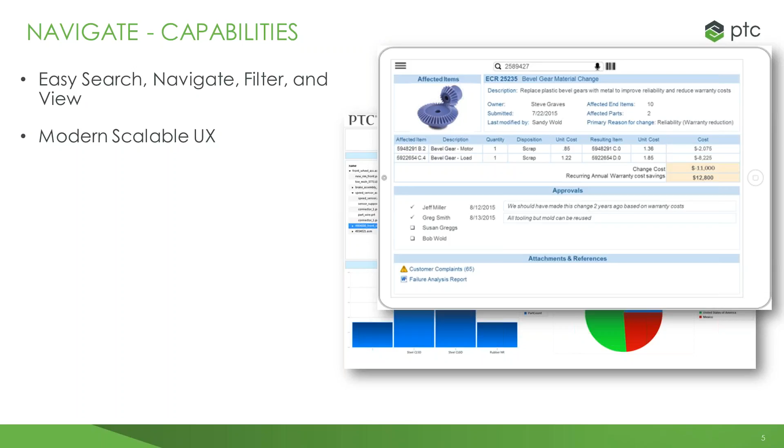It provides a modern, scalable user experience, being able to pull this information up within a web browser. You can view it just like you would within Windchill. You could view it within a tablet. You have all that capability right at your fingertips. Then lastly, it provides an interoperability layer for all other applications. Being able to move smoothly between these different applications where the information is residing allows for a quicker ease of use and a very simplified user interface.

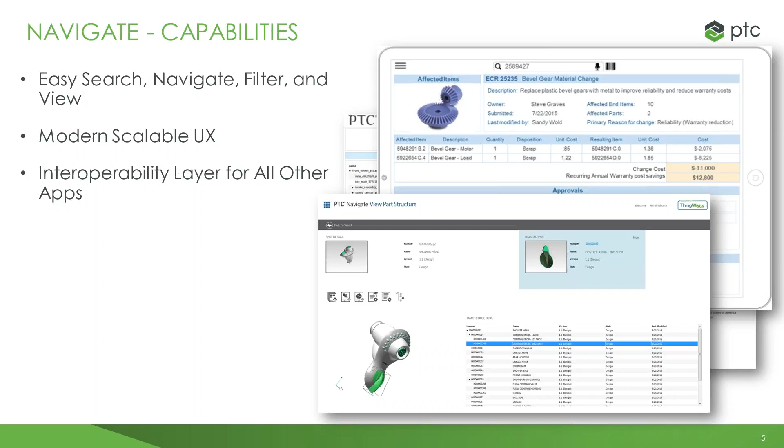So what we have here is basically a laundry list of the different out-of-the-box applications that you get within Navigate, so pre-configured. I'm not going to run through these. I'll mention a few of them, but we're going to be going through these much more in depth in the demonstration. So such things as view drawing, very important for people on the manufacturing floor if they want to pull up information without having to go into Windchill necessarily.

Then they can search a part number, and the corresponding drawing will come up. You can view the part structure just like that of Windchill. You don't lose that functionality here, as well as being able to view and measure in 3D. So a lot of the functionality has been ported over into Navigate, but it's very, very simple to get to.

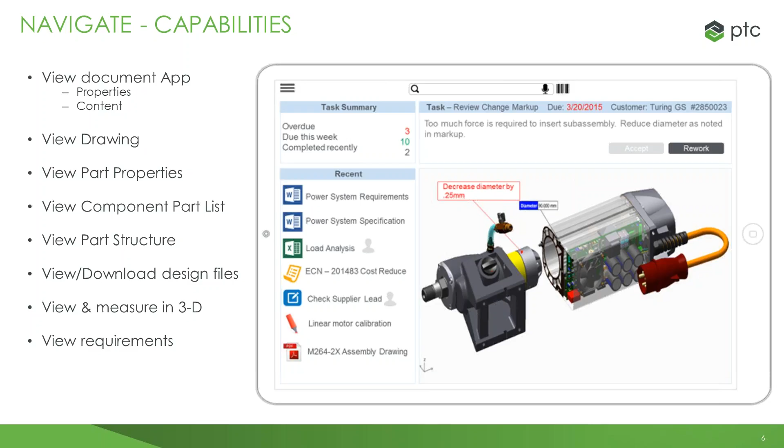So moving on. This is a slide that I'd like to show because it talks about the architecture behind PTC Navigate. And specifically, we're talking about PTC Navigate View, so the ability to view the information within the system that you want to take a look at. It provides a dynamic connection to multiple systems of origin, whether they be PTC core products or even customer systems such as ERP systems. So on the bottom visual, the PTC systems are anything that's in blue. So we have a direct Windchill extension from ThingWorx for such things as PLM.

So what we're probably mainly focused on today is PDM Link and Project Link, but also you have the customer systems that are funneling through, whether it be ERP, legacy, or Rational systems. So all of that comes into ThingWorx, which is our rapid application development platform, and really allows for the connection of multiple systems into basically one single common area. And this is the backbone; this is what basically sits on top of Windchill and really pulls the information into Navigate View and ultimately up into the user role with their single sign-on.

So as you're logging into Windchill, you log into Navigate just the same, and this information is going to be present, but it's going to be in a different type of format, very easy to use, very easy to consume. You can utilize data from many sources, whether they be cloud solutions, on-site, or software as a service. And Navigate allows for tailoring and deployment of the apps very quickly. So you can upgrade and replace the back-end systems without really affecting the upfront users, as well as being able to present data for specific user roles.

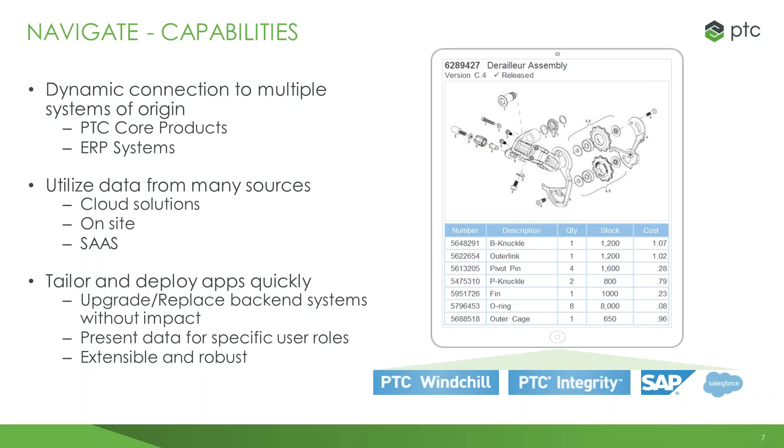And we could talk a little bit more about this within the demonstration. It just goes to show how easily and effectively you can find the information. It's also extensible and robust, so you can deploy this within days and weeks rather than weeks to months. It's a very, very robust type of approach.

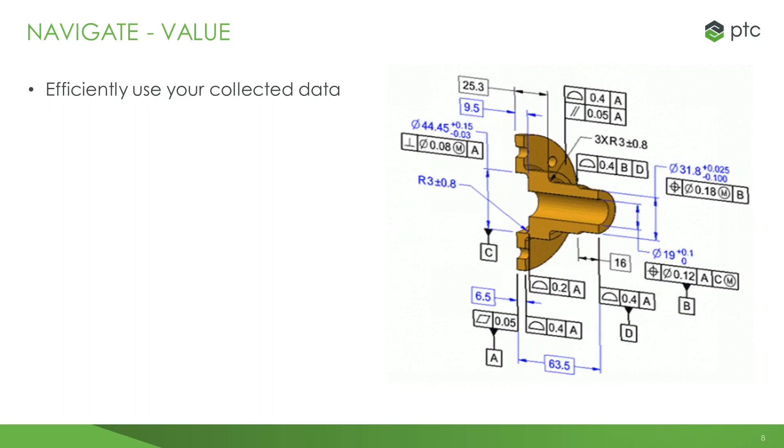So ultimately, how do these capabilities tie to value? What does Navigate bring to the table that we at PTC feel that it does? So the ability to efficiently use your collected data. You may have tons and tons of data within Windchill, but how many people are accessing it? Is it everybody within your processes that you want to be a part of the process? Might not be. So really taking that data and democratizing it throughout the entire enterprise is great. You get more eyes to see the information. You can make better decisions based off of that, and you have a more holistic product development process.

And what I'd like to make an analogy to is iPhones and iPods and iPads have made it very simple. Everybody just wants a single click, and that's the application that I want to open up. That's the information that I want to see, and Navigate is a lot like that.

Really involving all the stakeholders, and I mentioned this earlier, the idea of having the throughput from your entire organization rather than just a single discipline or role really opens up a lot more opportunity, a lot fewer errors, a lot fewer mistakes that can be made, because you're much better informed, you have the information at your fingertips, and people are being much more productive and efficient throughout the day.

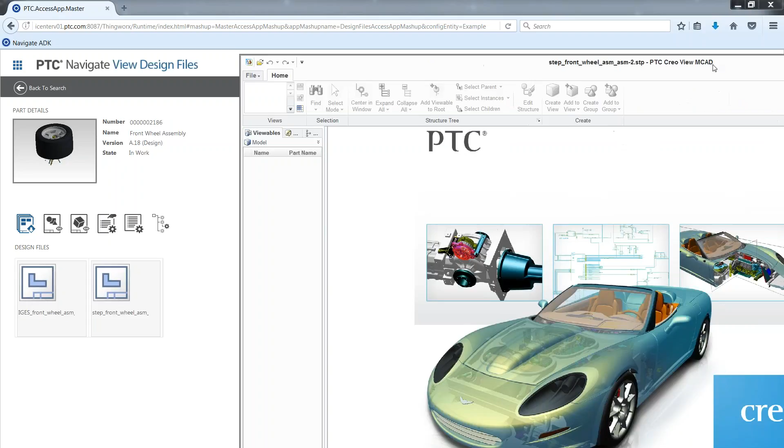So we're going to select on the design file for the STEP, and what this is going to do is launch within Creo View, and Creo View is going to be one of the major tools within this demonstration, in being able to look at this documentation or this information very quickly within a viewing tool, and it really helps to paint a picture as to what you're looking at.

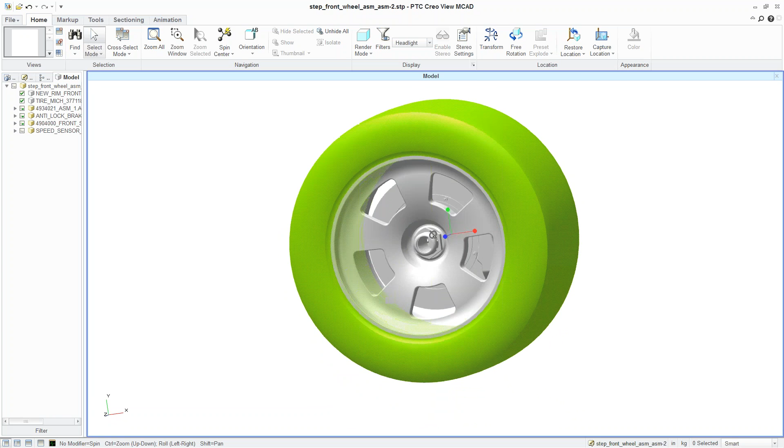And that's obviously what Windchill prides itself on as well. We're just carrying that over into Navigate. So we have a very bland looking front wheel assembly. Don't worry, there's another file that looks a lot better than this one. But this is mainly, if you wanted to see the design file, you have this access.

You can further interrogate the model. You can look at it, view it in 3D space, just really allowing the user to gain valuable insight to what the object they're looking at is. So just like that, a few simple clicks, you're at the design files. Let's take a look at some of the other part applications that we have here as well.

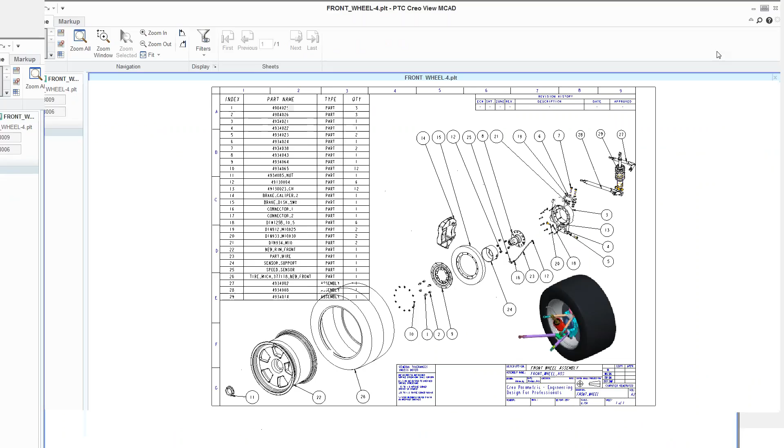So next up here, if I hover over, we see the view drawing. Now this might be good for someone on the shop floor, someone that wants to take a look at a drawing very quickly. They don't want to have to go through the tough Windchill user interface, and especially they don't want to have to bother an engineer to pull up a drawing for them.

First of all, they're probably going to have to walk from the manufacturing floor the whole way to where the engineers are sitting. That takes time out of the day, but they're also, again, losing time on both parties. So being able to pull this information up with a simple click, now we're cooking.

So what we see is we have just a sample drawing within our system. We have some call-outs if they want to see some part numbers, some quantities in which they need to work from. They now have quick and easy access to this information, and they can move on with their day.

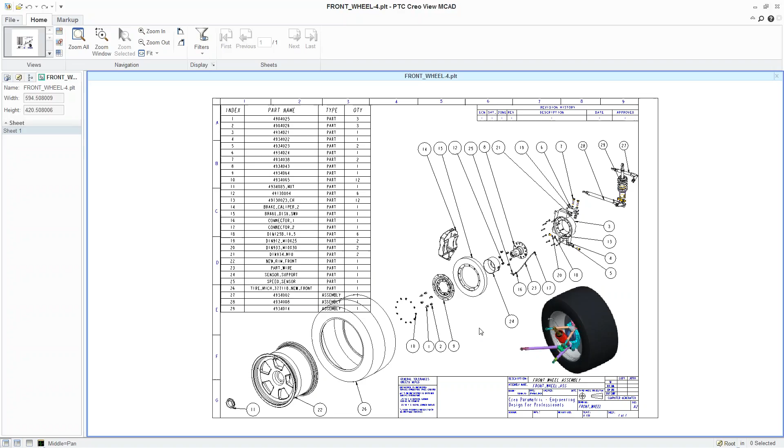Okay, moving right along from left to right, view and measure in 3D. So this is going to be used to get a little more comfortable and a little bit easier to look at. But what we have is Creo View opening up within our native browser. So it's not opening up separately off of a client. We're running right from Mozilla Firefox.

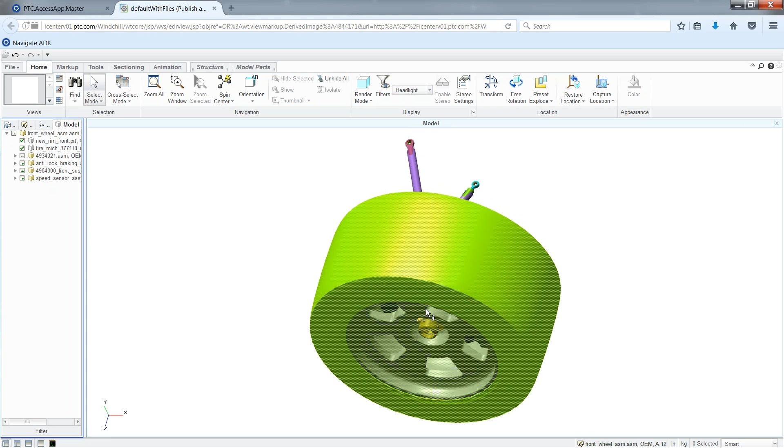So again, we have our 3D model, taking a look at it. And again, this might be something that someone on the shop floor might see as somewhat important to them, because these are based off of the 3D CAD models, and they are accurate based off of those representations. So what you can measure in here is going to be accurate of what is predetermined within the CAD model.

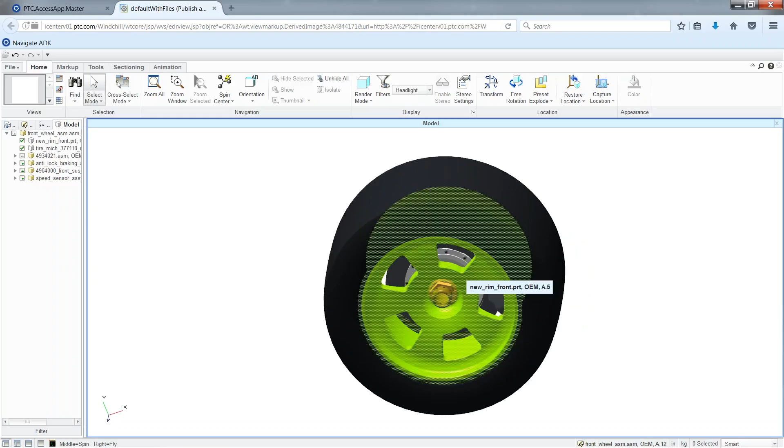So some tools that Creo View has to offer is a measurement tool. If we wanted to measure the diameter of, say, this rim, we can do so. A few simple clicks, now we have this diameter, and we can use that, whether it be for our consumption or we wanted to measure something in real life just to make sure that everything was checking out. So now we have some accurate information to pull from, as well as this 3D rich documentation.

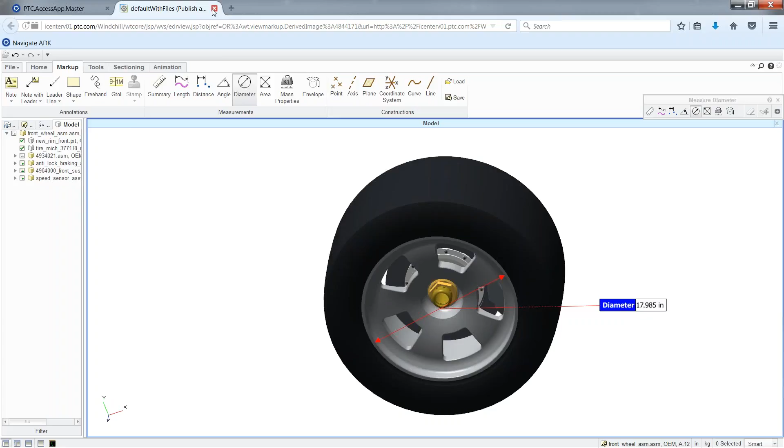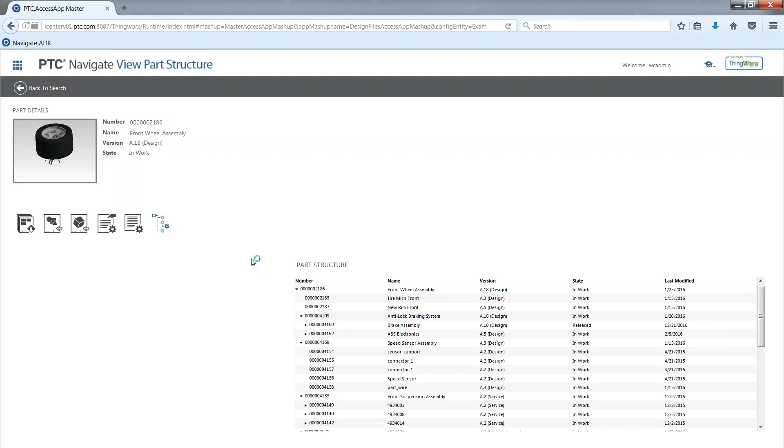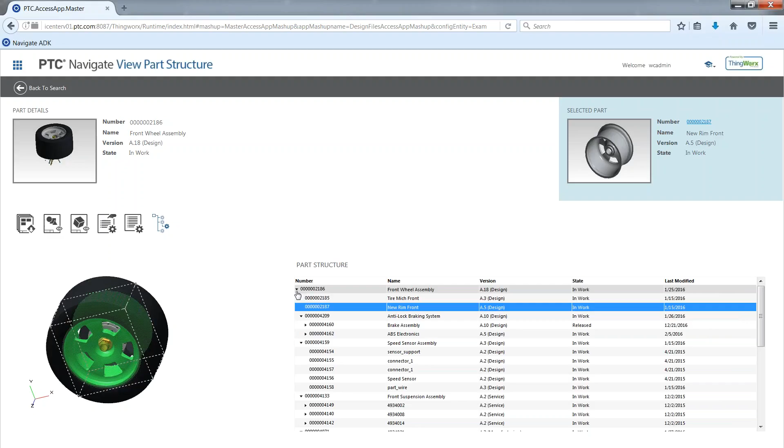So we're going to skip on over to the part structure. If we select on that, it is going to be very similar to that of Windchill. It is an interactive type of approach. We have the viewable on the left-hand side. We have the cross-referencing that happens if we were to select in the viewable, then it shows within the part structure, and vice versa. So you have that ability to help you interrogate the model, really figure out which part or which component or assembly that you're ultimately looking at.

So let's go ahead and collapse some of these to show the interactiveness here. And we're going to specifically work with the anti-lock braking system. So I have the viewable showing up here on the left-hand side, as well as the selected part showing up in the upper right-hand corner.

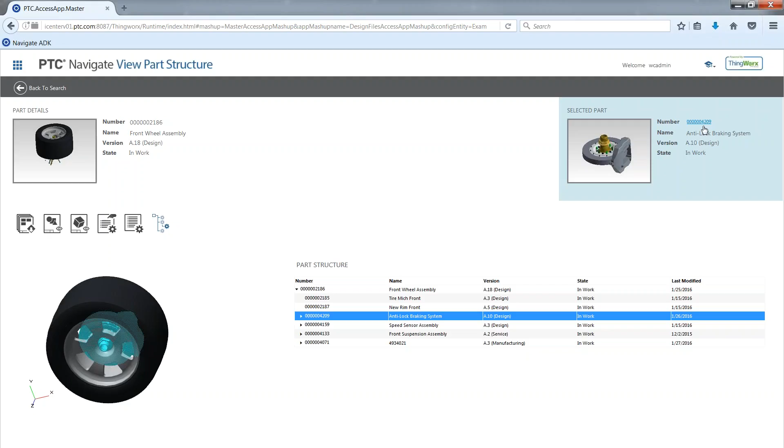So this shows some of the attribute information streaming in from Windchill, as well as a direct link to this anti-lock braking system assembly. So if I select on that, I am now a level deeper. I am now at that anti-lock braking system, and that part structure has now populated here as well.

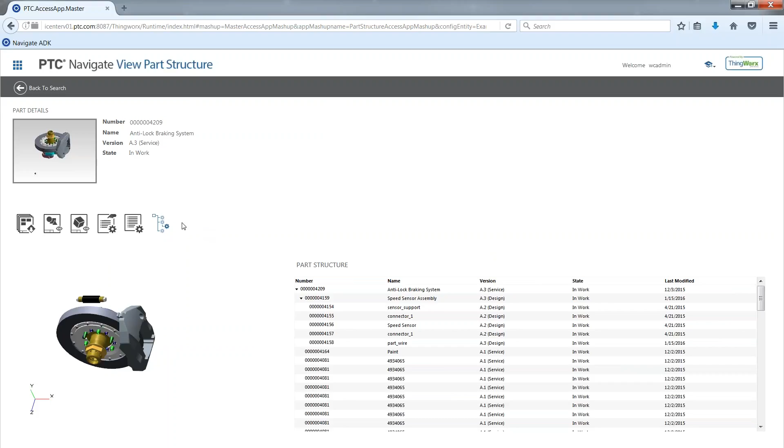So the last piece of the puzzle, the last application that I wanted to take a look at, for the out-of-the-box applications at least, is the parts list. So if I select on that, this will pull up basically a table, much like what you would see within potentially Excel or something like that.

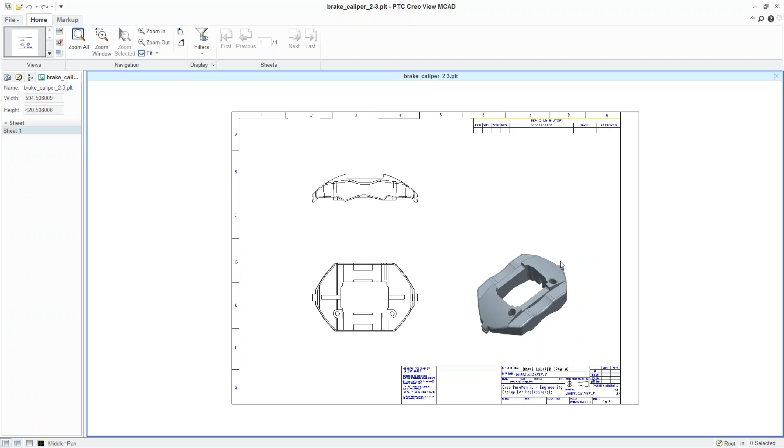So just like that, we now can take a look at a higher level assembly, top level assembly, and see what parts specifically have drawings that I can use, I can consume, however you plan on using drawings. And I wanted to point out here that drawings, if they're in Windchill as PDF documents, Navigate can absolutely open up PDF documents as well. We just have the system configured for these files to open up within Creo View.

So what I wanted to do is save the best for last. So if I select on this extra link here, we are presented with a new customer application that is definitely a little bit vibrant and different than what we've seen within the out-of-the-box applications. So before I got into it, I wanted to point out the usefulness of this customer application. Really, the idea is that we want to provide the customers freedom in which they can provide their end users with a custom application that is specific around a use case that they see is important.

So for instance, it could be around manufacturing. If you wanted to pull up work instructions from a simple click onto an application, type in a part number and pull up some process plans or work instructions, you can do so. And we give you the freedom to do that with the application development kit. What we have here is a sample customer application. This is what we've created within PTC to showcase this ability. And let's go ahead and get into that.

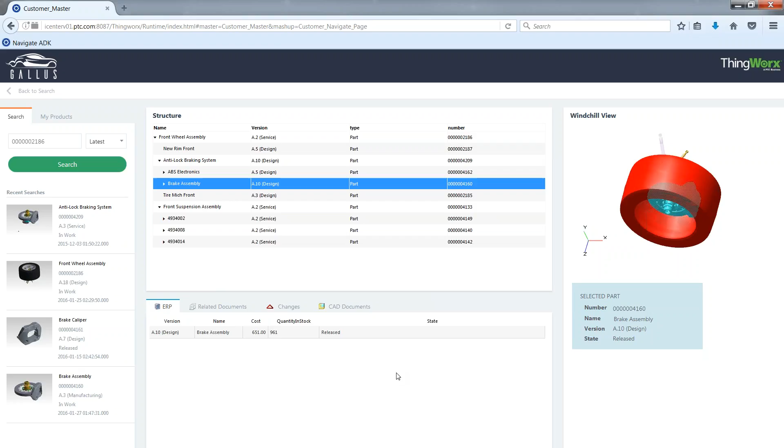What I wanted to quickly point out here before we wrap up is that with the ADK, the Application Development Kit, it gives you the ability to really pull in the information that you want to see. So if you wanted more information from your ERP system that you believe your users would benefit from, then you can do so, and it's very simple to do. It's made easy through the ThingWorx foundation that we see up in the upper right-hand corner. ThingWorx makes this all possible, and the Application Development Kit gives you that freedom to work within this environment.

So at this point in time, I'm just going to go ahead and go back to the home screen and wrap up there. And that's going to wrap it up for me today. We're going to go ahead and pass it over to Rob, but I wanted to point out that there is obviously Q&A at the end. If you guys have any questions, feel free to shoot them out.

Thanks, Brad. I think you did a great job. I think it was very direct and to the point concerning what the capabilities are of the system. I think it's pretty exciting and very interesting that you can also connect your ERP system into Navigate, and I think this is a pretty tremendous tool. But we'll see - I know there's been a lot of inquiries with a lot of PTC's larger accounts into Navigate, so we'll see what it means to the smaller and mid-sized businesses too. This is a really cool tool. Sure, I would agree. Nice job.